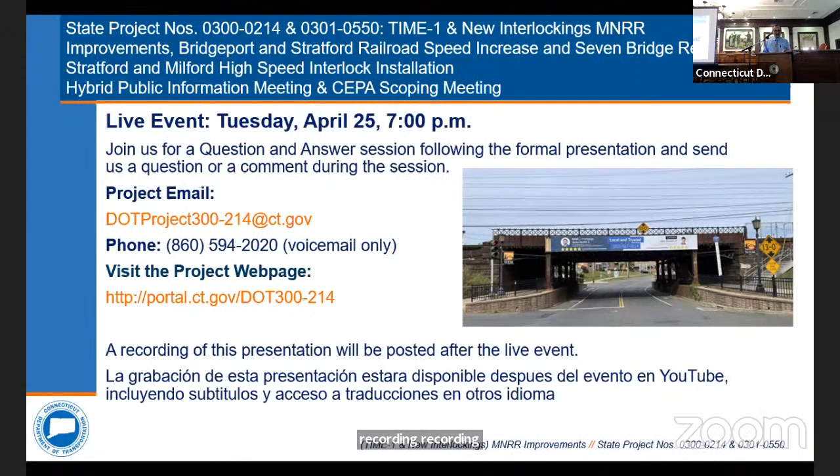Visit the project webpage at the following link. A recording of this presentation will be posted after the live event. How to view the captions or subtitles is presented on the screen.

Captions and subtitles is Zoom only. Click the show caption button. Click the speaking language button. Select the language you need from the list.

State project number 300-214, TIME-1 new interlocking improvements. There is a meeting overview, housekeeping, formal presentation of design, explain existing conditions and define purpose and need, proposed recommendations, and live question and answer session will follow.

Question and answer by email: dot-project300-214@ct.gov. By phone: 860-594-2020. By chat: Zoom question and answers will be posted to the Zoom chat event. Project webpage is at the link.

Note that the comment period is open through May 9, 2023. The Zoom question and answer session is only available during the live question and answer sessions.

How to use Zoom question and answers: select the Zoom Q&A tool at the bottom of the Zoom webinar window. The question and answer window will open on the right side of the screen. Please type your question in the text box and click enter. If you are an audio-only participant, dial star 9 to raise and lower your hand.

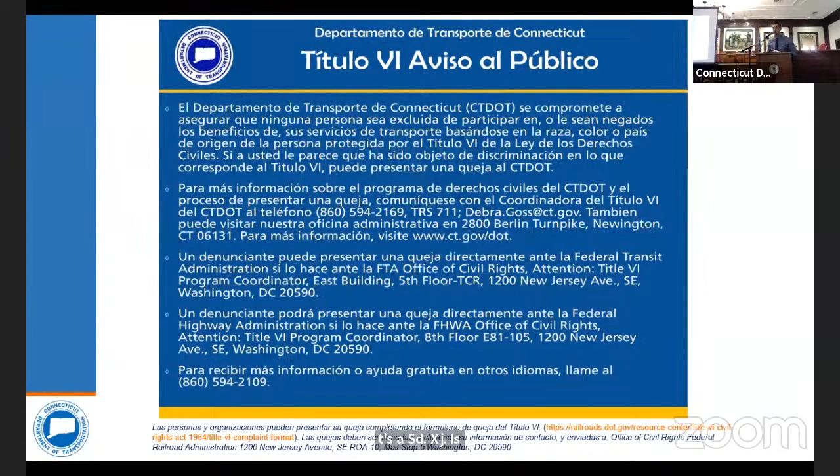Now, Kevin will be here.

Thanks, Louis. Everybody can hear me all right? Good, all right. Well, hello, everybody, thanks for coming out tonight. My name is Kevin Fleming, and I'm a transportation planner here at DOT in the Office of Environmental Planning. As mentioned, we're here tonight for a public informational slash CEPA scoping meeting.

So what exactly does that mean? Well, the Connecticut Environmental Policy Act, or CEPA, provides a public process for the various state agencies to follow to identify and review any action that may have an adverse effect on the environment. And since it is a public process, a really important component of CEPA itself is the public's opportunity to review a project and give feedback.

So your comments here tonight, and throughout the entire public comment period which expires on May 9th I believe, is a really critical part of a successful CEPA process.

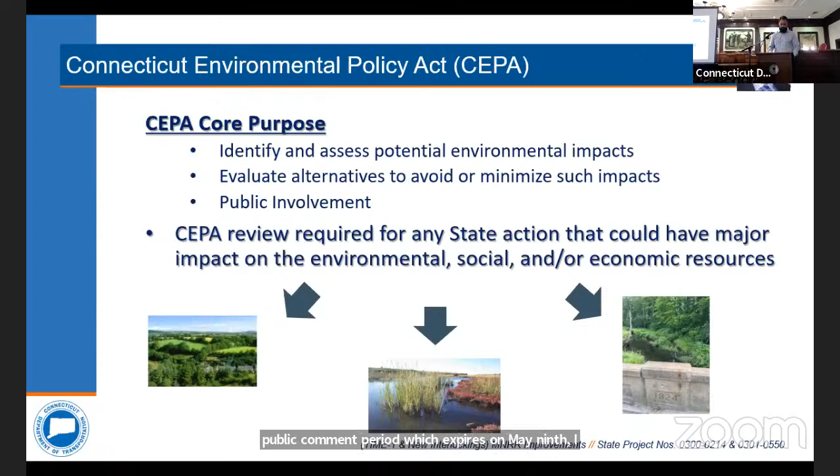As you can see here, we have to consider a really wide range of environmental resources under CEPA. Although this isn't necessarily an all-encompassing list, it should give you a good idea of the types of resources we evaluate under the Connecticut Environmental Policy Act. We look at everything from impacts to cultural resources and noise, to recreational facilities and impacts to environmental justice communities. Since there's federal funding involved in this project, we also have to ensure compliance with the National Environmental Policy Act.

So now you have a general idea of what CEPA is and what resources need to be evaluated. What do we mean by the term scoping? CEPA scoping is defined as the gathering and analysis of information that a state agency will use to establish the extent of environmental review for a proposed project. Basically, it's a way for us to get information from the public and other state agencies so we can determine the proper level of environmental review and documentation needed for a particular project.

This process begins when we publish a notice of the project in the Environmental Monitor, which kicks off a minimum 30-day public comment period. For those not familiar, the Environmental Monitor is an online publication run by the Connecticut Council on Environmental Quality, and it informs the public of all projects that have to go through the CEPA process. For this project, the CEPA notice appeared on April 4th, and the comment period will run until the close of business on May 9th.

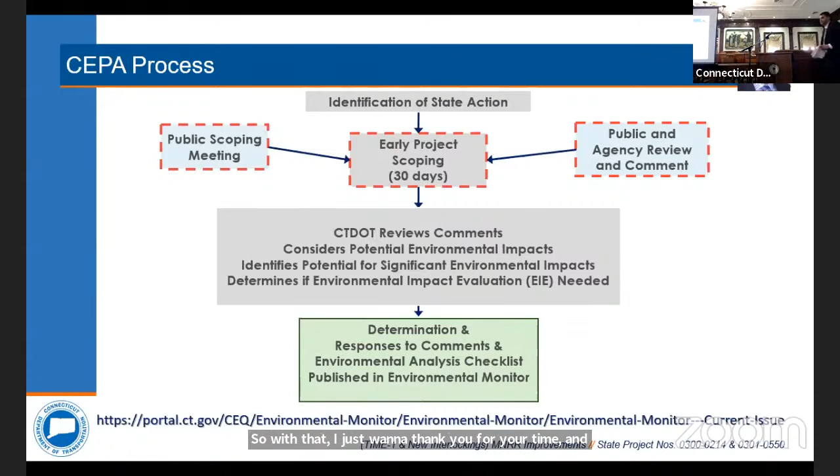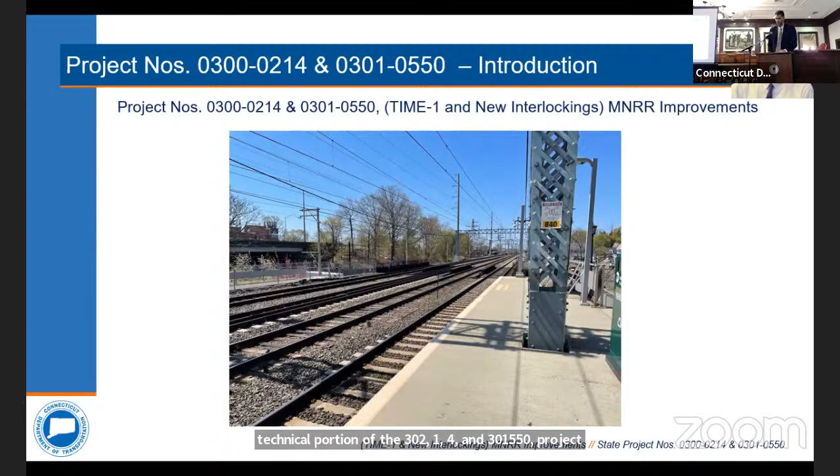Track improvement, mobility enhancement, TIME-1, project 300-214. The purpose of this project is to increase the maximum authorized speed of the 3-mile section of Metro-North Railroad from Bridgeport through Stratford from 70 to 90 miles an hour.

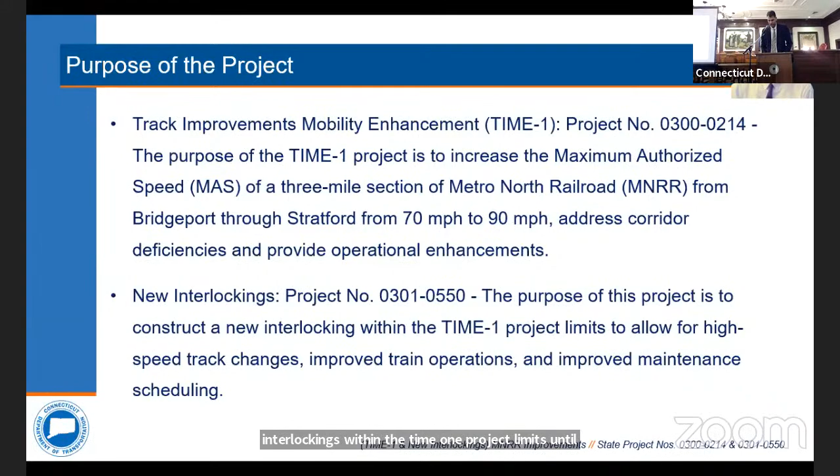The new interlockings project, 301-550, addresses corridor deficiencies and provides operational enhancements. The purpose of this project is to construct new interlockings within the TIME-1 project limits and to allow for high-speed track changes, improved train operations, and improved maintenance and scheduling.

The primary purpose is to increase the speed from 70 to 90 miles an hour for the max authorized speed and address corridor deficiencies. In order to meet that purpose, we're going to set new track with a 14-foot track center spacing where allowed.

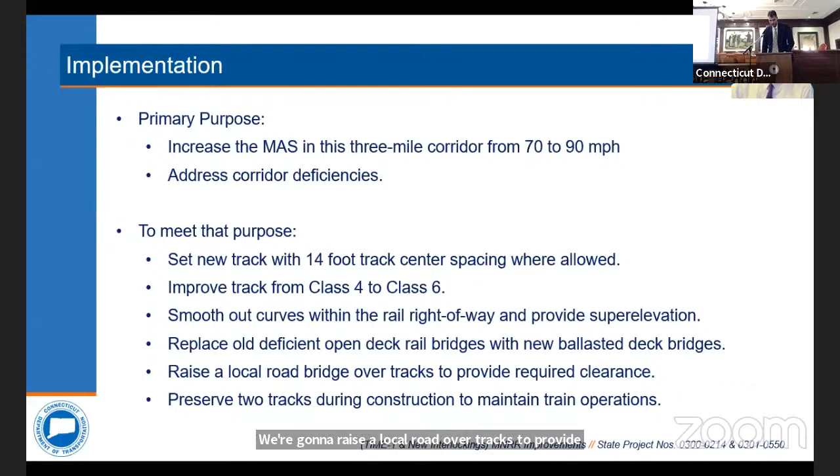We're going to improve the track from a class 4 to a class 6 track. We're going to smooth out curves within the railroad right-of-way and provide super elevation at those curves. We're going to replace old deficient open deck rail bridges with new ballasted deck bridges. We're going to raise a local road over the tracks to provide required clearances, and we're going to preserve 2 tracks during construction to maintain train operations.

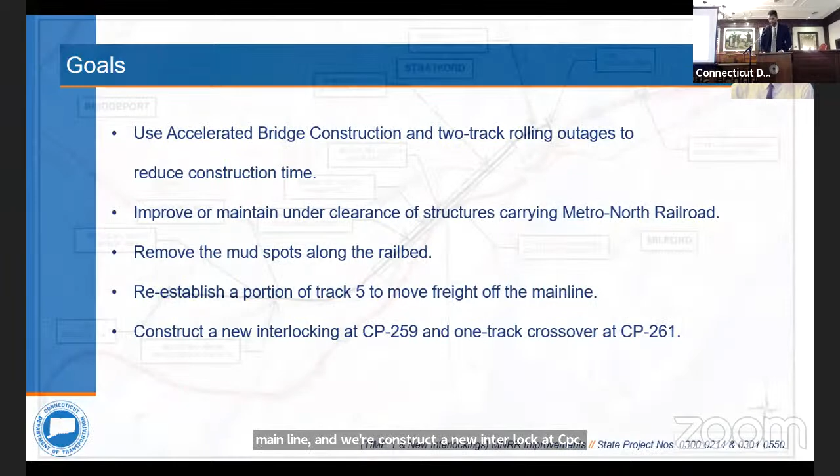This slide shows the project limits from due east of Seaview Avenue in Bridgeport on the left side of the screen, all the way through East Main Street and just due east of East Main Street in Stratford.

Part of this project, we're replacing the catenaries from approximately Bishop Avenue all the way through East Main Street. In the center, where we have the tangent section of track, is where we're going to put the new high-speed CP 259 interlocking.

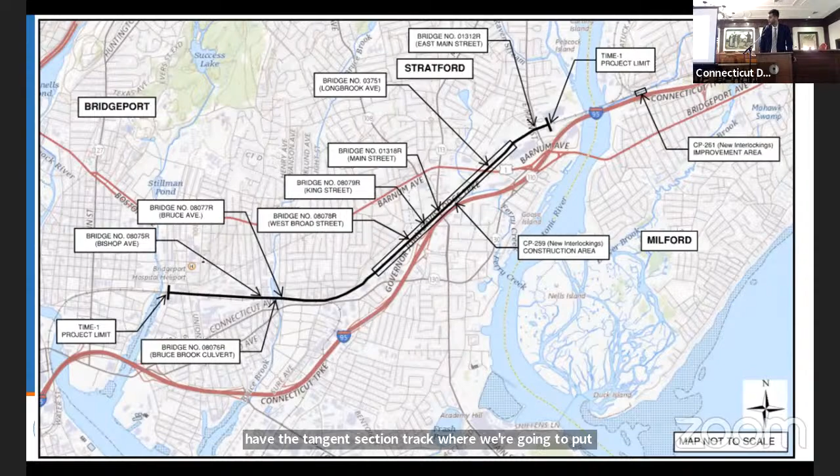These are some shots of our existing infrastructure, the existing bridges out there. In the top left-hand corner, we have Bishop Avenue, top right, Bruce Avenue. Bottom left, we have West Broad Street, and the bottom right, we have King Street.

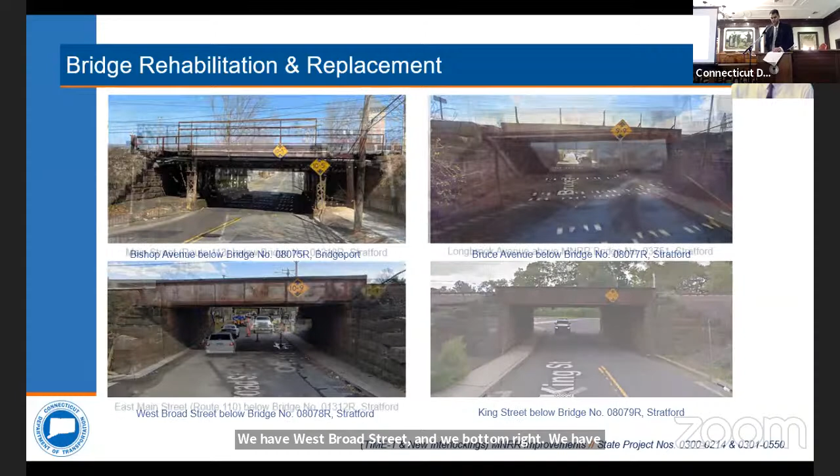On this slide, we have Main Street in the top left, Longbrook Avenue in the top right, and then East Main Street in the bottom left.

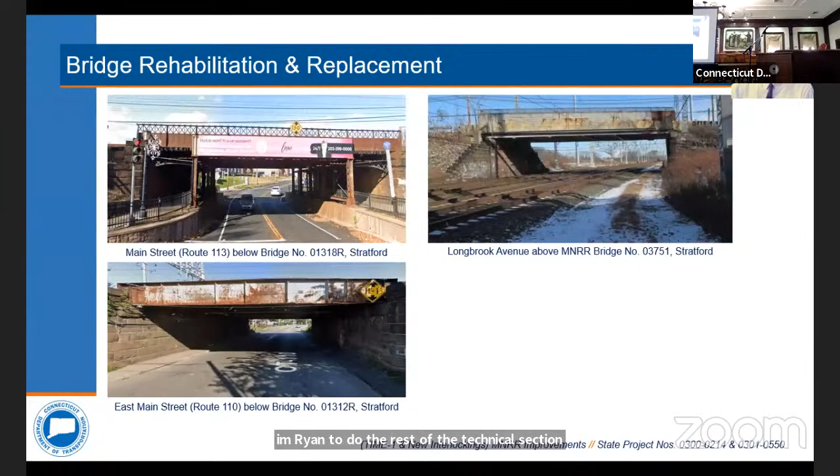All right, now for the good stuff. There's a number of proposed improvements along the corridor to take the maximum authorized speed from 70 miles an hour to 90 miles an hour. We're going to talk about some roadway and bridge improvements in a second, but I just wanted to take a moment to talk about the actual rail corridor first.

So this is a cross section taken in the middle of our rail corridor. There's a couple of things I want to point out. The gray tracks are on the bottom, and you can see there's a dimension there. The existing tracks have a 12-foot dimension between the center line of tracks.

One of the things we want to do as part of this project is increase that distance between tracks to 14 feet. This graphic basically shows that we can still fit that within the rail right-of-way, even though we're widening the track that used to be an old track that we're taking out. So there is some space there, it's within the existing right-of-way.

This section also shows that there is a profile raise for the tracks in the middle of the corridor. As you see, for most of the bridges, they're very tight horizontally and vertically, so one of our goals is to try to open that up as best we can. In this section, we're able to raise the tracks to increase the vertical clearances on some of these bridges.

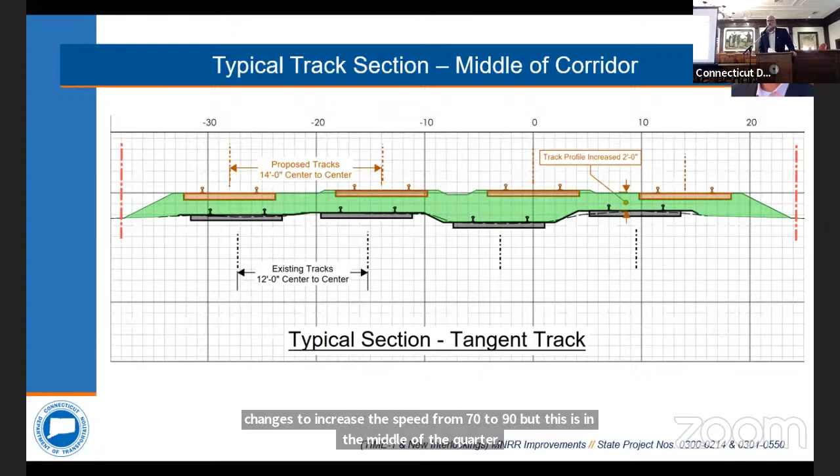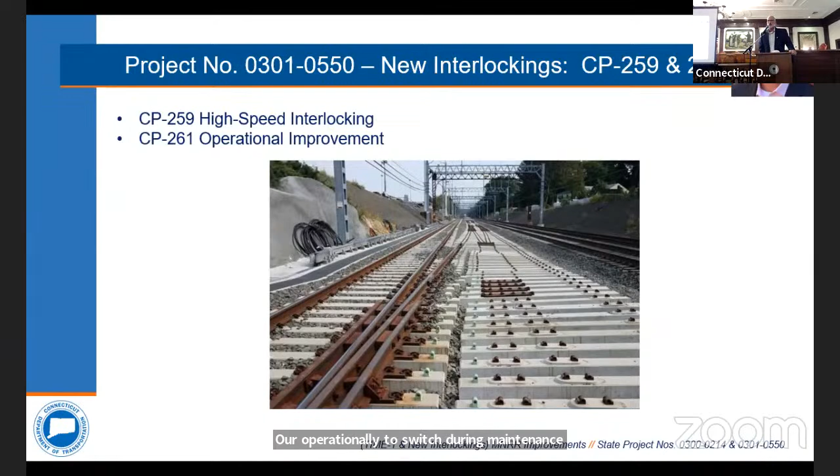Also, as part of the project, there's 2 interlockings, and in layman's terms, this is really an operational improvement for the trains to cross over between tracks. There's 4 main tracks going through there, 1, 2, 3, and 4, and this will help the trains operationally switch during maintenance activities, which will be more intense with the 90-mile-an-hour speed, and also for construction of the Devon Bridge.

So here's the corridor again, and I'm going to start on the left-hand side, bottom left. That's going to be Bishop Avenue. And then we're going to go east, towards New Haven, along the rail corridor. So let's start with Bishop.

There are boards throughout the room on the entrances and over there as well. If you want to get into a little more detail, I know these graphics can be a little small, but let's start with the colors here. The yellow is new roadway construction, and the orange is new sidewalk or new bridge.

For this particular bridge, we'll be replacing the bridge. A lot of the bridges on this corridor were built in the late 1800s, early 1900s. They're all pretty old, so our goal is to address the structural deficiencies and also try to open up the vertical and horizontal clearances. This is showing just Bishop construction here, really ancillary to the bridge, not much going on.

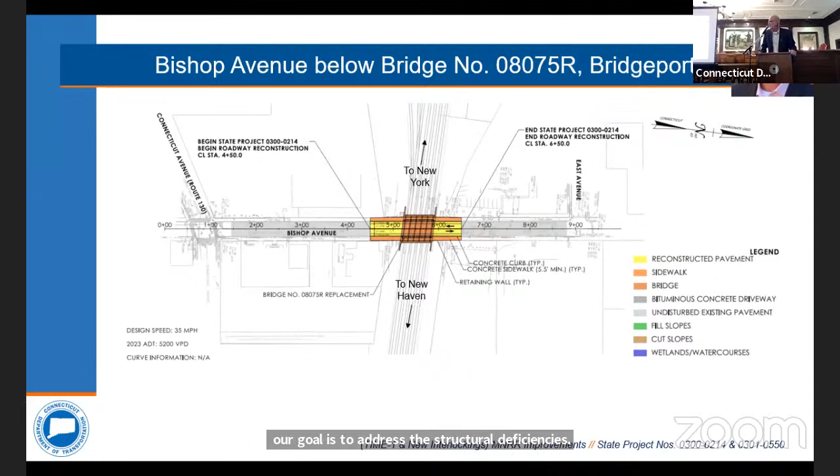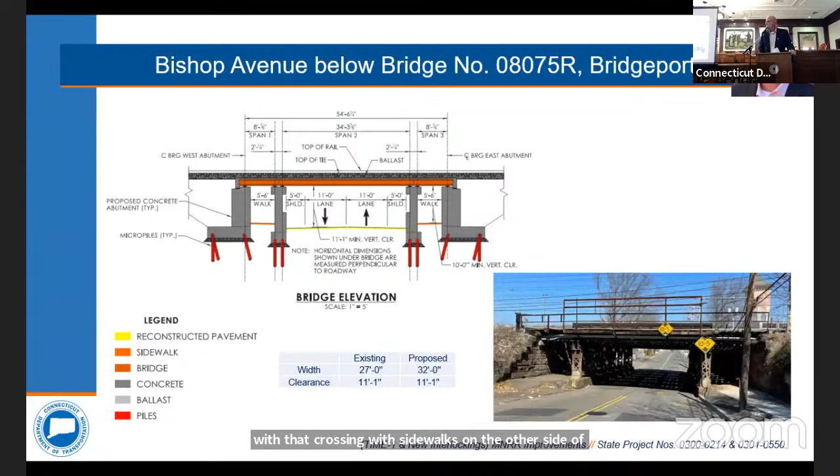This is a detour route. I can't see it from here, but the detour would be from Bruce Avenue to US Route 1.

For all of the bridges, we anticipate a short duration closure for bridge construction. We don't know the exact length of the closure, but we're doing everything we can to minimize that length at all of these bridges. We're about to embark on a traffic study to look at, if one bridge was closed, where that traffic would go, and then take that additional volume to the next bridge and do an analysis to make sure there's not too much delay during construction.

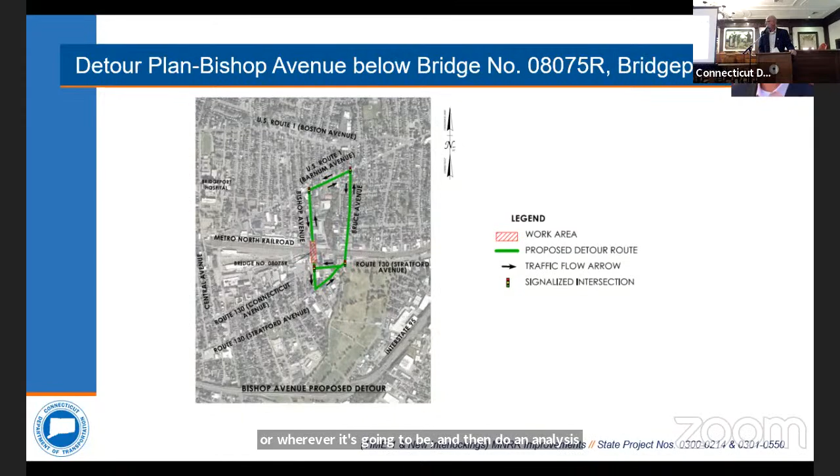All right, the next bridge is Bruce Avenue. Much like Bishop, the roadway construction is really ancillary to the bridge.

We also looked at drainage in this area because it does flood due to Bruce Brook from Bruce Pond. We did an extensive study and tried to come up with ideas or types of mitigation for that flooding, but it turned into well beyond the scope of this project. There are some downstream constraints heading towards 95, so we thought we wouldn't be able to include it with this project because of the scope and our purpose and need for this project.

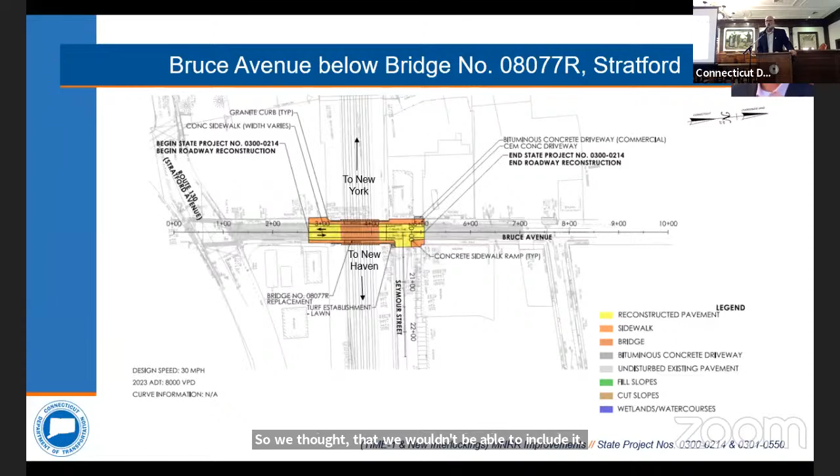Let's go to the next slide. This slide shows that we do have a slight raise in the profile of the tracks here, so we are able to raise the vertical clearance.

The existing vertical clearance is 10 feet, and the proposed would be 11 - that's a 1 foot raise. We would like to raise it to 14 feet, but there are constraints at both Bishop and Bruce. There are major utility corridors there, and we've talked to several utility companies. Also, drainage is an issue if we get too low because we're already flooding. We get into some pump stations, which we're probably going to need because gravity systems don't work when we're so close to the shore.

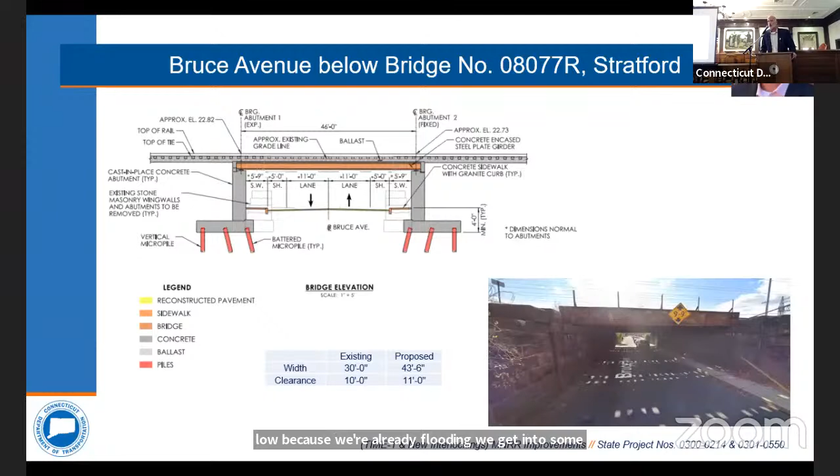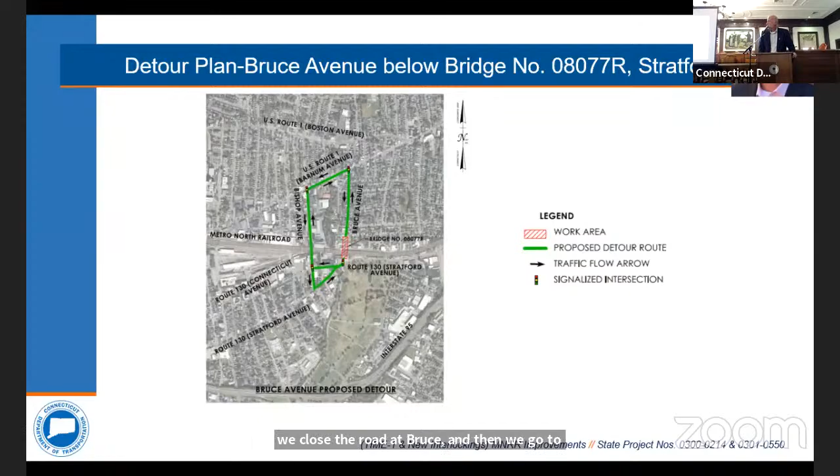So the detour for this bridge would be the opposite of Bishop. We would use Bishop, so that would have to be open when we close the road at Bruce, and then we go to US Route 1 and back down again. All right, next bridge is West Broad.

So West Broad has a little more construction, as you can see here. We did a traffic study for West Broad, a traffic study for Main Street, and a traffic study for East Main Street.

What we found is that traffic queues from the intersection at Linden Avenue back underneath the bridge, then onto California and Knowlton. So we increased the roadway width underneath the bridge to 3 lanes so those cars can be stored within that roadway section and not spill over to the intersection to the north. That's going to be a widened section through here over what's existing.

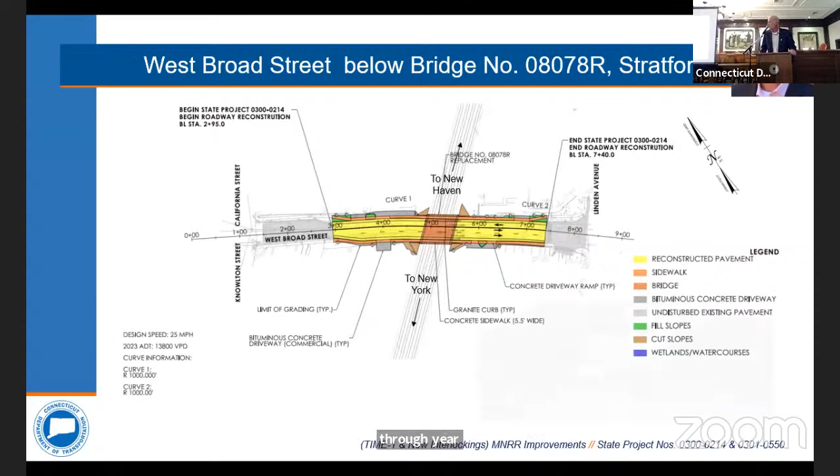This shows the bridge elevation, a pretty dramatic change from existing in the bottom right. With a 10'9" posted, the vertical clearance is 11, and this one would be increased to 12'7" — about 19 inches, pretty significant. Also the roadway would be wider here, so it's really going to open up, and it helps with the interchange of 95 just south of there.

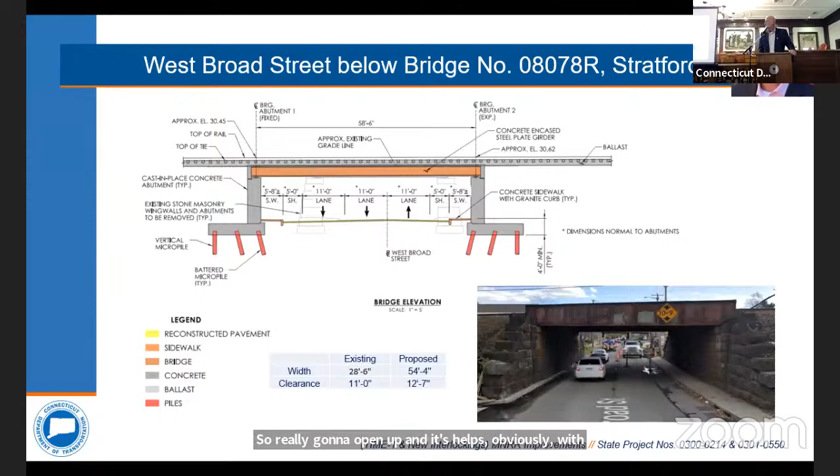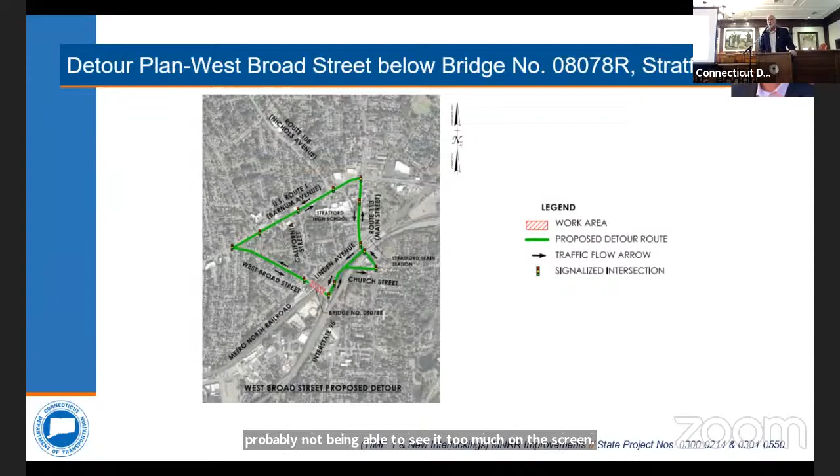And then that shows the detour route for West Broad, probably not easy to see on the screen, but we do have boards throughout if you want to look at more detail.

All right, next bridge is King Street. King Street existing is narrow and also has a low vertical clearance. There's also a steep grade coming off of Linden as well. So this is again going to be a total bridge replacement, and you can see the roadway reconstruction limits here.

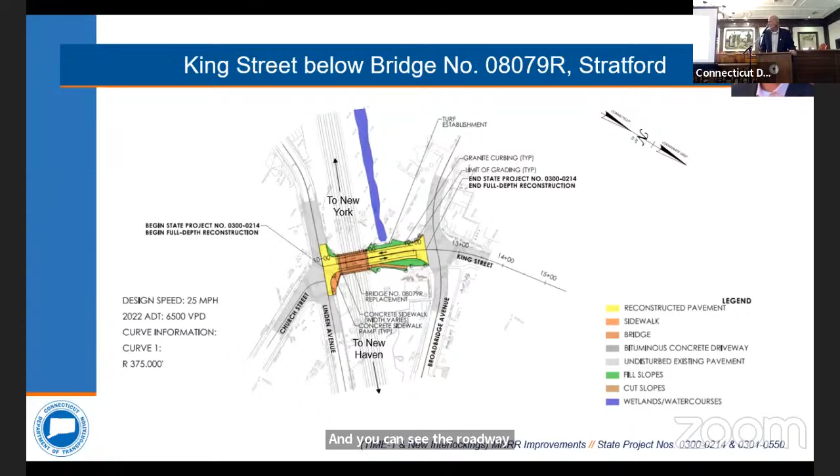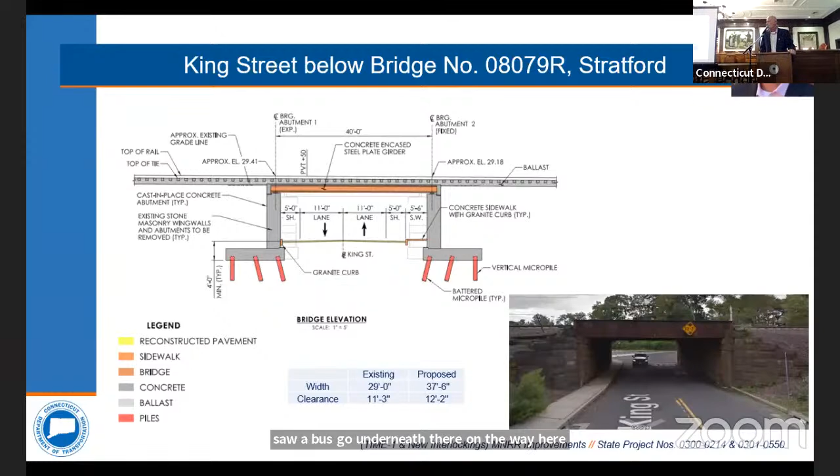We just saw a bus go underneath there on the way here today, and it was pretty tight, but they were able to go through it existing. And then there's the detour for King.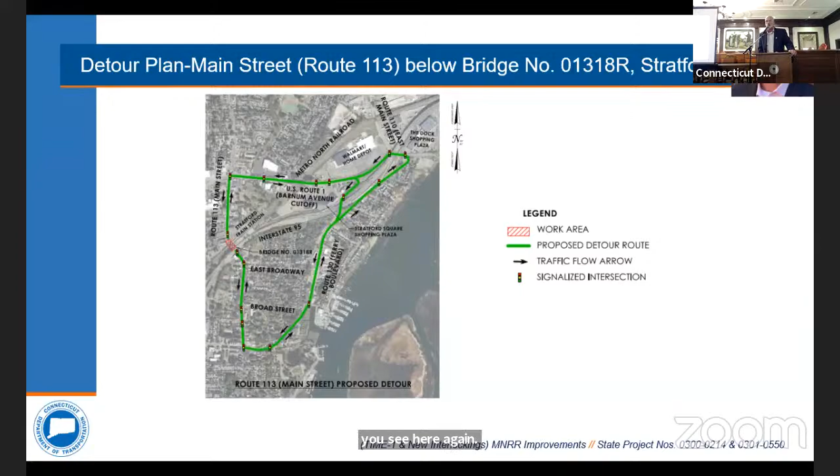Next bridge is Longbrook Avenue. So this bridge goes over the tracks, whereas the other bridges were railroad over a local road or a state route.

So this one has significantly more roadway construction. This is because the existing bridge over the tracks has a substandard vertical clearance. So we need to raise that for the higher speeds and the catenaries that go underneath the bridge. Right now, the catenaries are too close to the bottom part of the bridge, so we need to raise it. It's pretty significant, about a 4-foot raise in the profile. So this is the proposed reconstruction to be able to raise that profile.

And there you can see in the bottom right, the existing bridge over the tracks, and then in the top left, you can see the proposed bridge going over. So vertical clearance wise, existing is 17.7, and we need to be about 22.6, which is our minimum vertical clearance over electrified rail.

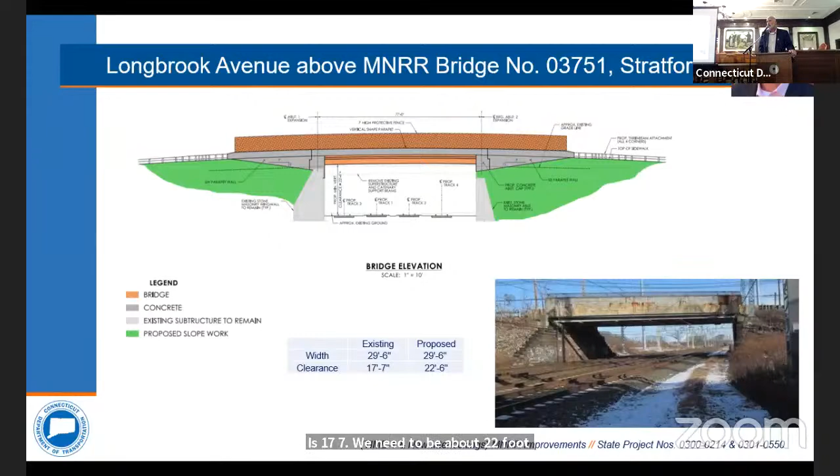So this is also a crossing that we did a traffic study on, because it's an arterial route with a lot of volume here. So if we're building a bridge that's going to be here for 75 years, we wanted to do our due diligence. We took traffic counts in 2022 and 2023, and then projected them to our design year, which is typically about 20 years in the future, to account for any growth.

And what we found is it operates pretty well. There isn't a queue that backs up underneath the bridge and beyond, and we feel verified about that. So what we're proposing right now is still 2 lanes under the bridge, and possibly a little bit wider for tapers. Still in the middle of that design process, but it doesn't look like a full 3rd lane is warranted based on the traffic analysis.

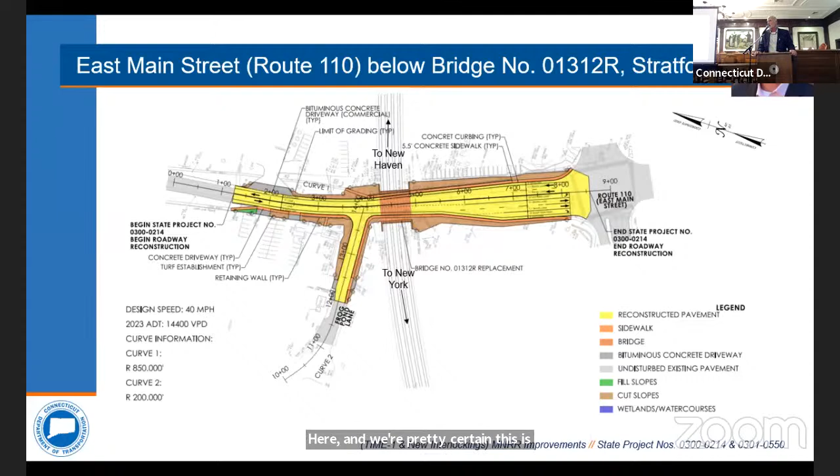Just can you go back to that one more? And I want one more thing on that one. So we were not able to raise the tracks here for some other project constraints, the Devon Bridge being just to the east. So we had to make up the vertical clearance by lowering the roadway. This has a pretty significant roadway lowering, about 3.5 to 4 feet here. And we're pretty certain this is going to need a pump station for drainage because the gravity system would not work here.

So the vertical clearance, now on the next slide, it's going from 11'4" to 13'9". So pretty significant raise here. And also because we're next to an interchange, we thought it's really important to really target certain crossings for as much vertical clearance as we could.

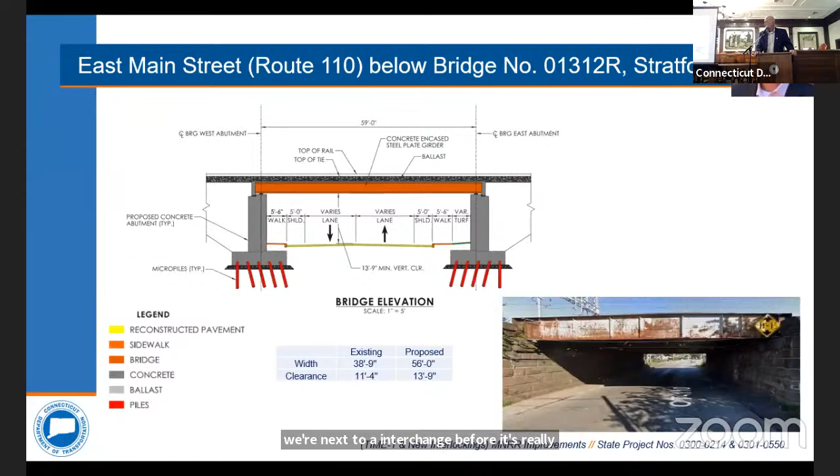And then there's the detour route for East Main Street.

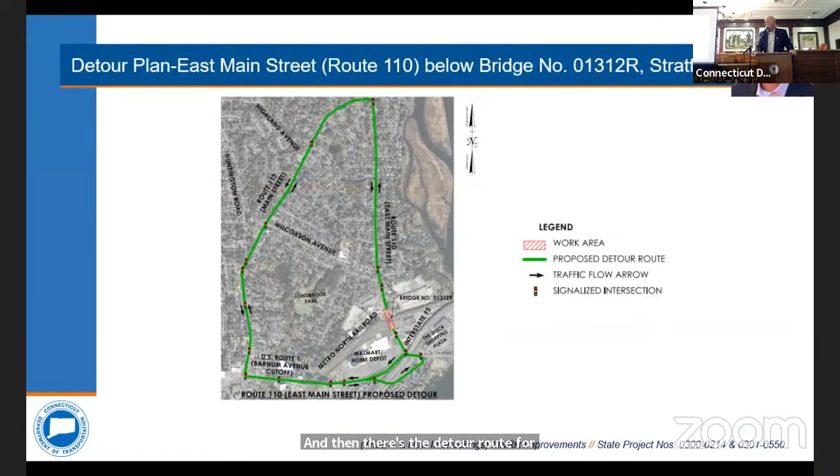Okay, now I'll turn it over to Matt to talk about the rights-of-way process.

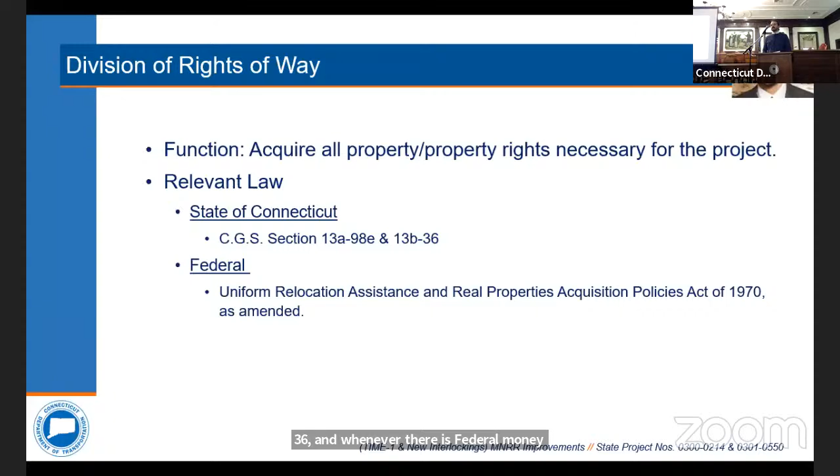Once the design has progressed to the point where we know exactly what property rights are required and we're ready to begin the right-of-way acquisition process, each impacted property owner receives a letter of intent to acquire along with a property map which depicts the exact rights to be acquired. At that point, we determine the fair market value of those rights.

We use that to establish an offer of just compensation. That offer gets sent out to the property owners in writing, and a right-of-way agent from our office is available to meet with the property owner, and they can explain in detail the project, the impacts to that particular property, and explain how the department came up with their offer. The property owner has a reasonable time to consider the offer and enter into negotiations if they choose.

And once an agreement is reached, the DOT prepares all the paperwork to transfer those property rights. They'll schedule a closing and they'll file any deeds and the property map on the town land records.

However, if negotiations reach an impasse, the department may acquire the rights it needs for the project through its power of eminent domain. And what happens in that case is the department files a notice in the local superior court along with a monetary deposit in the amount of that offer of compensation.

The property owner has 6 months from that date to file for an appeal if they thought that the offer was inadequate. Now, whether or not the owner elects to use their right to appeal, the money that was deposited in the court, the owner can apply to withdraw that at any time.

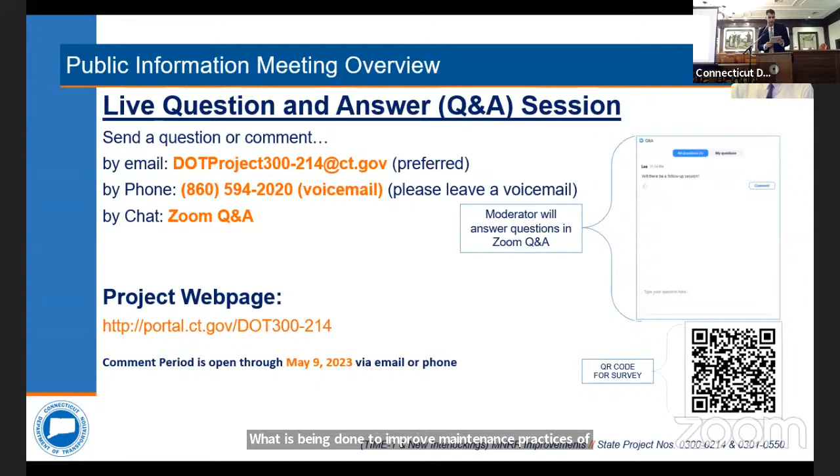What is being done to improve maintenance practices on the New Haven line, given the near-continuous regular maintenance and construction on its aging infrastructure since the 90s, often restricting a 4-track railroad to only 2-track operation while work is going on? This project is replacing 7 bridges, which will significantly reduce the amount of maintenance required daily, monthly, and annually. We're also removing mud spots to help the ballast, reprofiling the track, and replacing track and ties as part of this project, all trying to achieve a state of good repair. Are track laying machines being considered? Yes, we're considering track laying machines.

Is there work within the right-of-way? If the work is within the right-of-way, why is CEPA review required? For this particular project, we have to go through CEPA review because of the age of the bridges. Some of them are eligible for listing in the National Register of Historic Places. So anytime we're replacing a listed bridge, we have to scope it accordingly under CEPA, regardless of whether it's in our right-of-way or not.

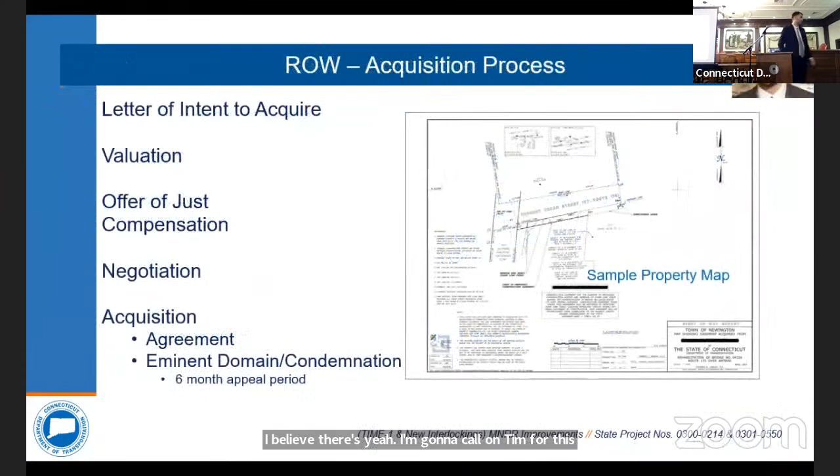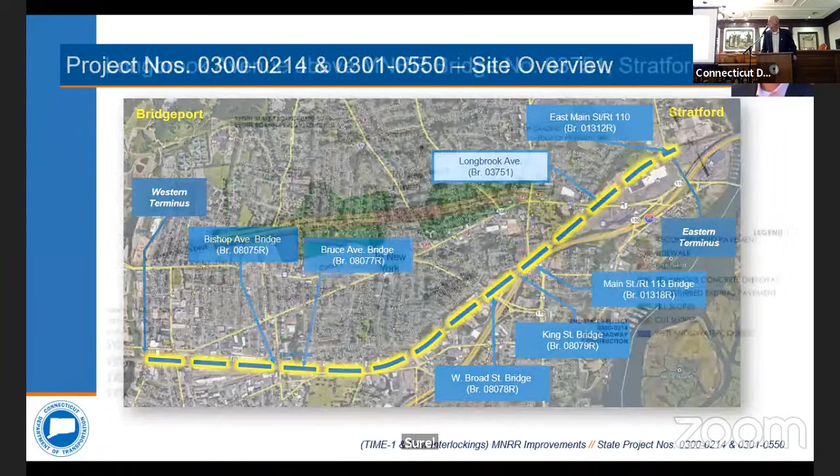It's a free for all.

Which should be addressed in another project.

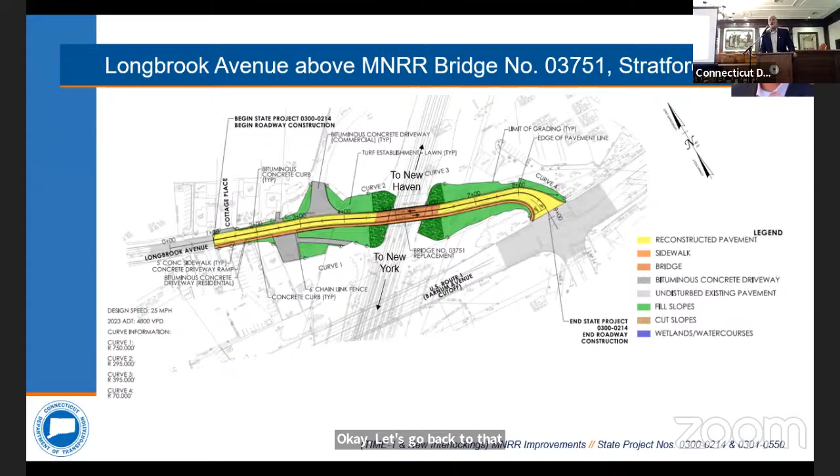I'll let Tim answer this. So, great question - kind of like a one-way couple, where you'd have one way on Linden and one way on Broadbridge. We really didn't want to restrict movements as much as possible, because while that could lead to a better level of service, it could also put an encumbrance on people on that street if we turned it into a one-way. So we tried to keep the operations existing and not make drastic changes. To your point, that could be something the town explores at a later date, but we didn't include it in our traffic analysis.

Well, if it happened to make sense, rather than doing it now - you had to go somewhere, and you only have commercial access.

That's a good comment. I'll answer your question and then move on. Just down drastically - it's not that big, but if it was down a foot, it's flooding.

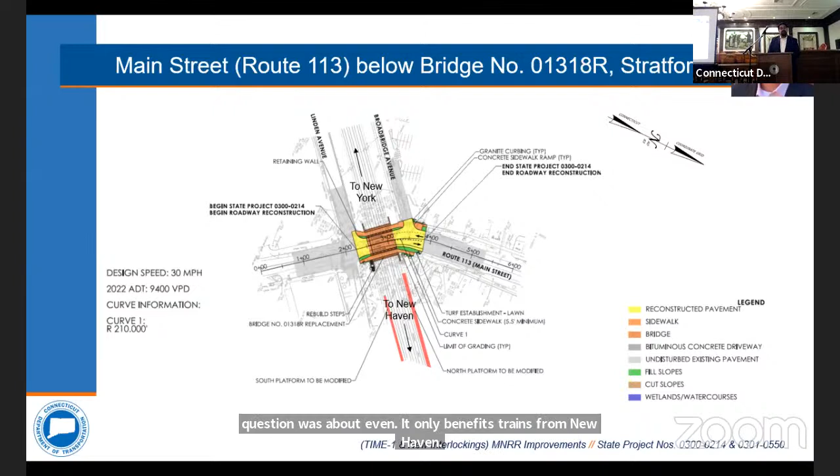Sure, yeah—segue. It's an easy way to figure out savings specific to this segment. Can they share exactly how many miles? It's approximately 3 miles of track. Thank you.

Let's see a few more questions that have come in from online. You want to go ahead?

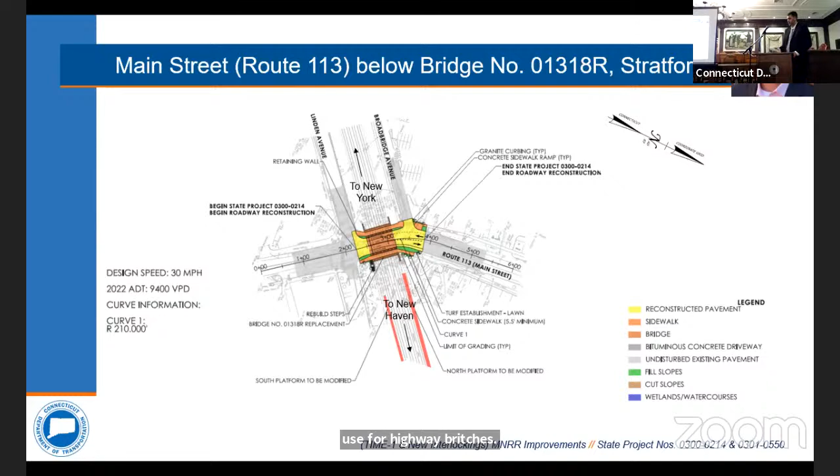Was this project designed to meet the specific overall goals of the New Haven to New Rochelle Northeast Corridor capacity and trip time planning study? The answer is yes.

Any other questions from online? Any other questions from anyone in the room? Ma'am.

The question was to explain why moving from a 12-foot center to a 14-foot center is beneficial for these projects, for train traffic. The answer is, with future trains moving at 90 miles an hour in either direction next to each other, the goal is to keep a safe distance so they don't blow out each other's windows, with a net closing speed of 180 miles an hour. Plus, in locations where we're banking the track with super elevation and the trains are tilted, we have to have a larger profile between them.